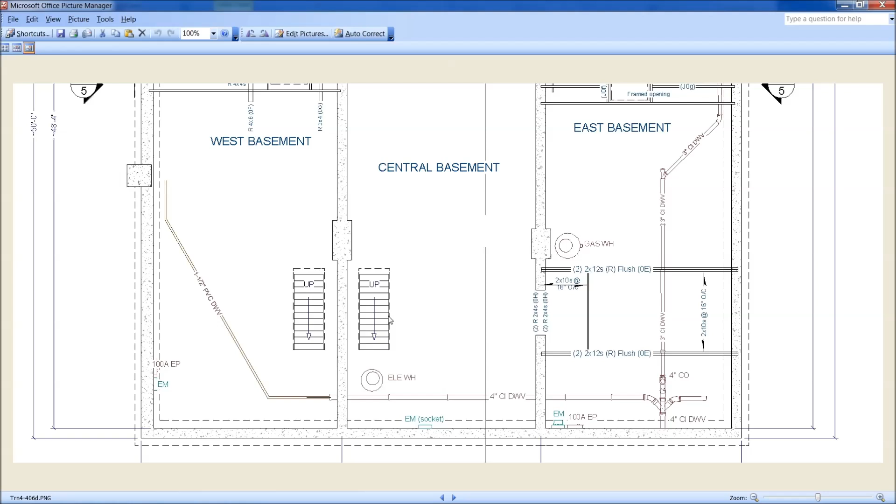But if you did want to rotate them around, it does make more sense up here for you to be coming in this way. It all depends on what you're going to use those basements for. If that's going to be a bunch of storage, which I don't think it is, you don't have that much travel. I mean, I'm not even sure it's worth the headache, but I did want to mention that you could actually just have those stairwells enclosed.

You would lose that floor space above them on both of them, but it would be possible just to put up walls with a door at the end, and then same steep stairwell, same floor framing, but you just have a regular door. And these walls, well, your walls are going to be out here. On this side, those walls would go all the way to the 12-foot ceiling.

On this side here, it's going to be a little funky because the ceiling's open over here. And then these ones go up 12 feet or whatever they go up. Now I want to get back where I was. With regard to that, I just wanted to mention that. Coming here then, I started trying to figure out this occupancy load.

And it's based on this table. And yours is an assembly. And so it's going to be, depending upon what the actual space is, this is how these calculations work out, occupant load. And that's further going to be limited by the number of bathrooms, et cetera. But theoretically, you could have a maximum occupancy. And I'm not quite sure. This is just based on net, and it doesn't include any numbers of square footage of the other areas.

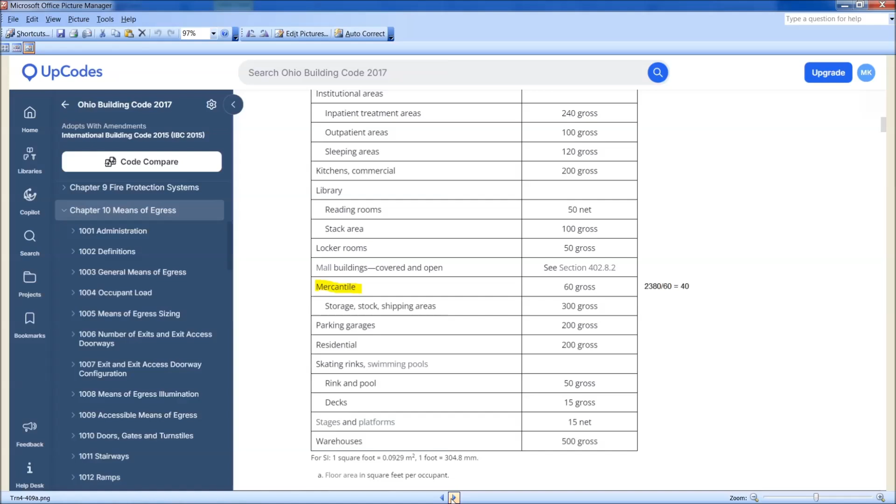So if I did this correct, though, you would have a maximum number that the fire department would say, no more than 318 people in here. Except you can't meet that with your bathrooms. I find out a little bit later on with the bathrooms I've put together already. But yeah, so go up here and see where I go with this. On mercantile, your maximum occupancy load was 40 because it was just mercantile.

And then your group is going to be group assembly A2 as near as I can figure. A2 includes all these. A3 includes all of these. So I used A2 to make a few different calculations and try to get some more information about changing this occupancy from mercantile to assembly. So I went with A2, and with A2 there's a way of determining how much egress you need. And so I went through all of this, and your building is going to require 2 exits, based on design occupant load.

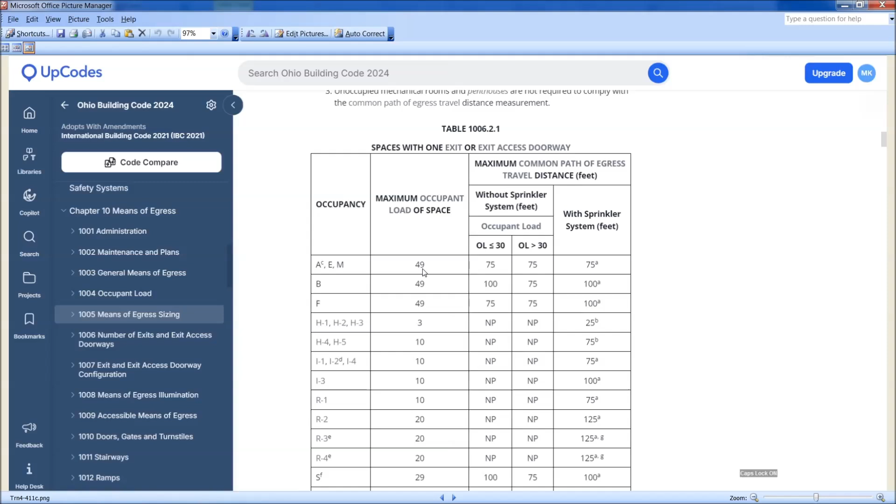Right. If you only had 1 exit, 49 would be the maximum occupant load of that whole space. But you already have plenty of existing exits. You don't need 3 or more. This is for people over 500, and you can't get to 500 just from the square footage limitation. And you can see, though, from 1 to 500, they want 2 exits from the building, and that will apply to the basement as well.

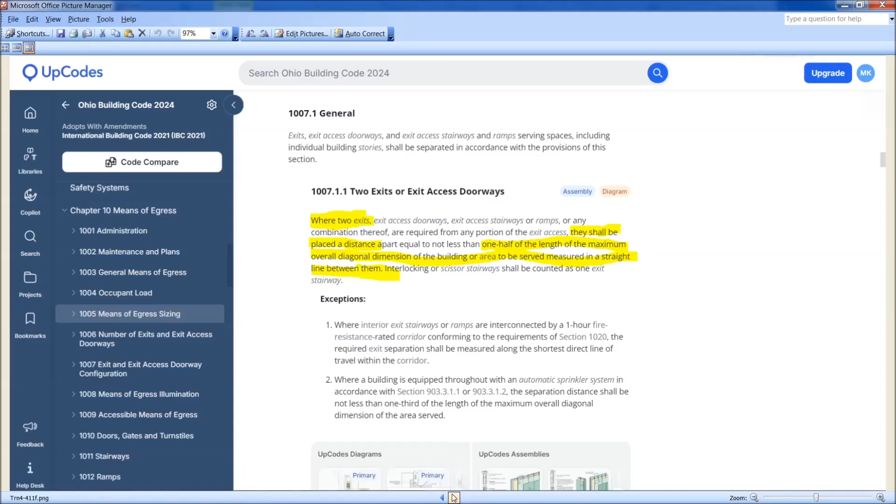They would want 2 exits out of that basement if you wanted to include that as part of your operation there. And then where these doors are, using this bit of calculation here, they want half of that diagonal line between the doors. The doors can't be any closer than that. And half of that diagonal line is 36 feet. The upshot of that is that one of these doors has to be part of your exit routes and your exit plans. All of those can be, but at least one or the other of these, at a minimum, will have to be included as part of your exit plan.

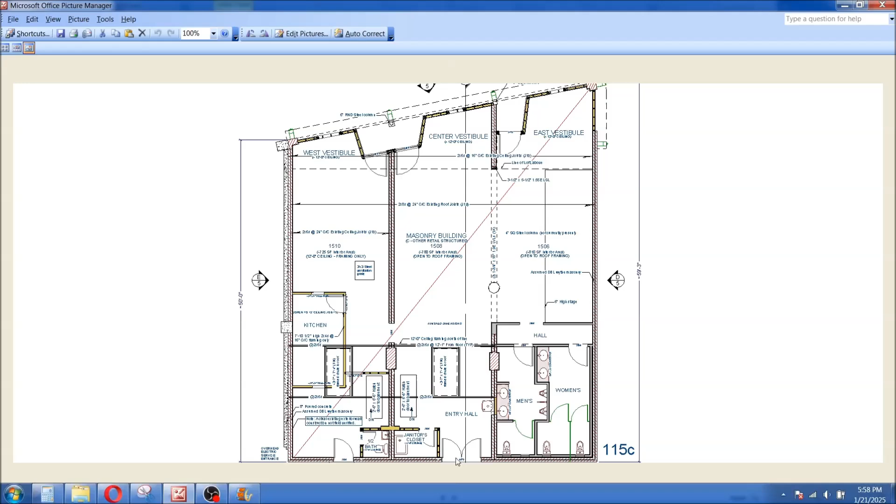And since you require 2 or more exits, you'll have to have this emergency electric system for illumination in the event of a power outage. And at least two of those doors will have to be accessible, but they're going to be accessible means of egress anyway, so you don't really have to worry about that.

And this next bit though is something you will have to worry about for sure. These side hinged swinging doors, which is what you're using in all of those locations, where they are going to be part of that exit plan. So at least one of those outside, one of those south ones, this applies, and those have to swing in the direction of egress travel.

So, even if you had an occupancy load of 318, all you would really need is 68 inches of doorway. So you just need to get two of those doors, one at the front and one at the back, swinging outward to be included as part of that needed 68 or 62 or however many inches it was.

And this last bit, since at least one of those south doors is swinging out, that is going to have a landing outside of it, and that landing has to be right level with your inside floor. So you're going to have that landing there, and then yet another step down. So that will not be accessible.

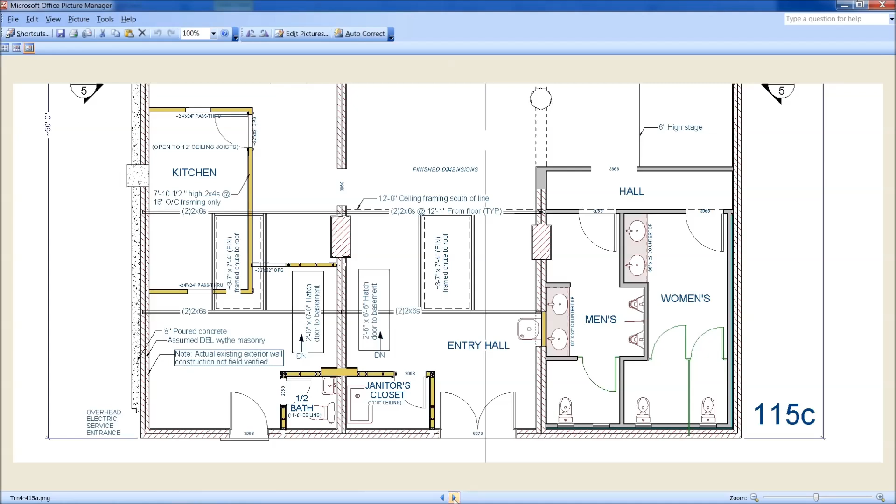Maybe there is. This next, hopefully the last part, is these minimums - how much plumbing fixtures you need given your occupancy. Again, this is all assembly occupancies down through here, but yours looks to me closest to this sort of thing. It goes down some if it's this or some of these other things, but I made these theoretical calculations - if we did have that max occupancy, because you have the doorways for it, you would need 4 toilets, 8 toilets total, and 5 sinks.

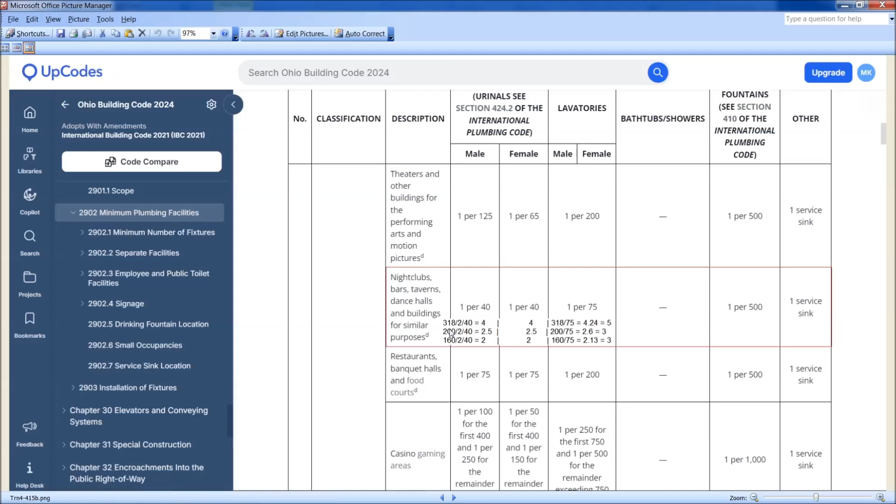But even at a maximum occupancy of 200 though, then we start getting closer to something that we have. So I kind of just said, well, even maximum occupancy 160, 4 toilets, and we have one more than that, and 3 sinks, and we have one more than that. So your maximum occupancy based on that is going to be some number between this 160 and 200 or so, I would think. Again, I'm just guessing.

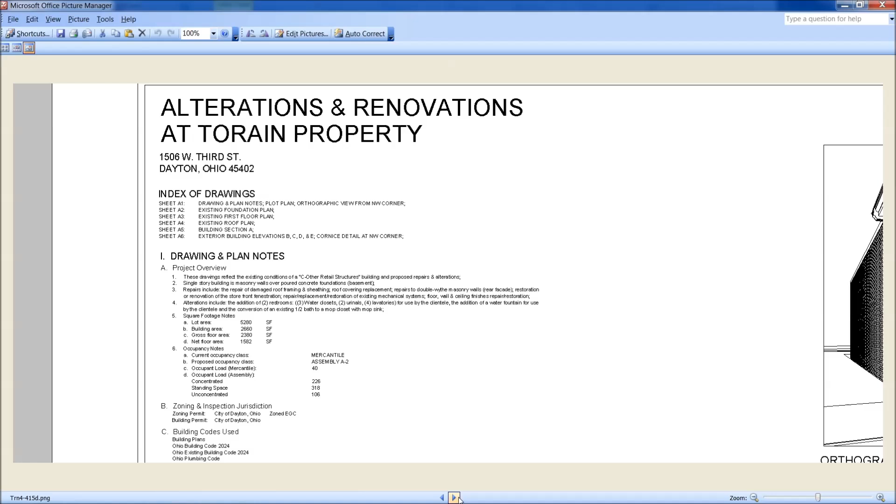This is kind of new to me, so I've been updating these now where they're more than just existing conditions plans. These are the alterations and renovations stuff we want to show to the engineer, hopefully at our first opportunity. And I've been updating these, and this section in particular has been added or kind of fleshed out some. Hopefully some of this stuff is - I'm sure all of this is correct. I just don't know that they want me to show this or whatever.

Oh, great, that's the end of it. That's the end of it.